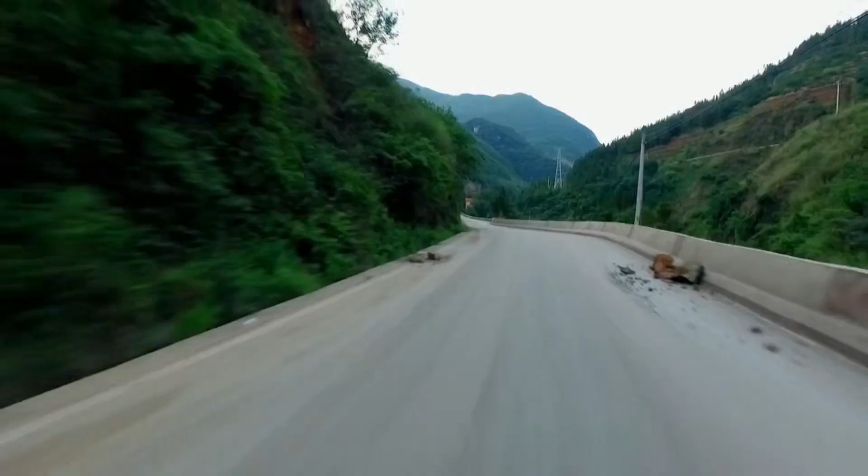The long trip down the steep slope and up the other side is treacherous. It's dangerous, the road, because there's a lot of sharp rocks, lots of steep gorges. You also see a few landslides, so piles of rocks on the side of the road, so drivers have to be very careful. This natural divide has a devastating effect on the community.

There's 35.8 million people in this region of Guizhou. With all these windy roads and steep valleys, it's very difficult for the local farmers to get the goods out of this county to sell them. So as you can imagine, it is one of the poorest regions in China. A solution is desperately needed. But with a nearly half-mile drop to the valley floor, nobody has ever bridged a gorge this deep.

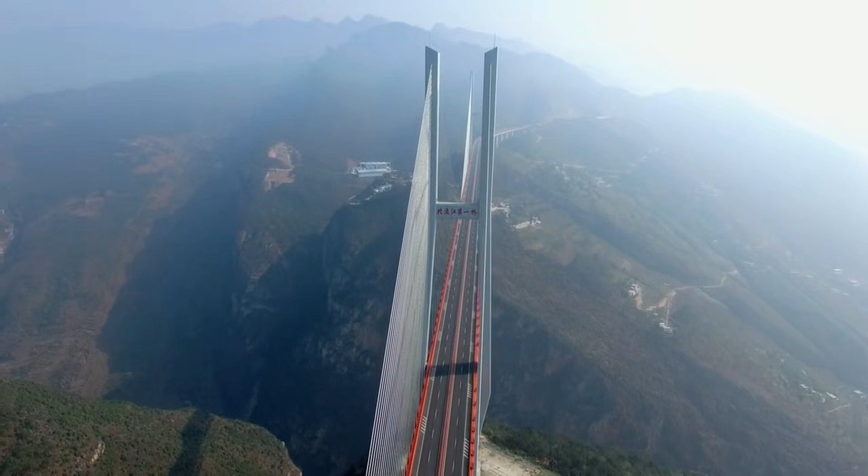The solution engineers in China have come up with is breathtaking. This is the Beipanjiang First Bridge. With a deck nearly 2,000 feet above ground, it's the highest bridge in the world. It is remarkable how high this bridge is and how long it extends. And at almost a mile long, it's one of the longest cable-stayed bridges on the planet.

Liu Ba is deputy chief engineer of the bridge. So this is the Beipanjiang Bridge. Yeah. It's normally off-limits to pedestrians, but he's giving two colleagues a unique tour. It's very high. Very high? Yeah, very high. When we came here, it's very difficult to go to the two sides. Yeah. It's the highest bridge in the world now. Yeah. Such a beautiful bridge.

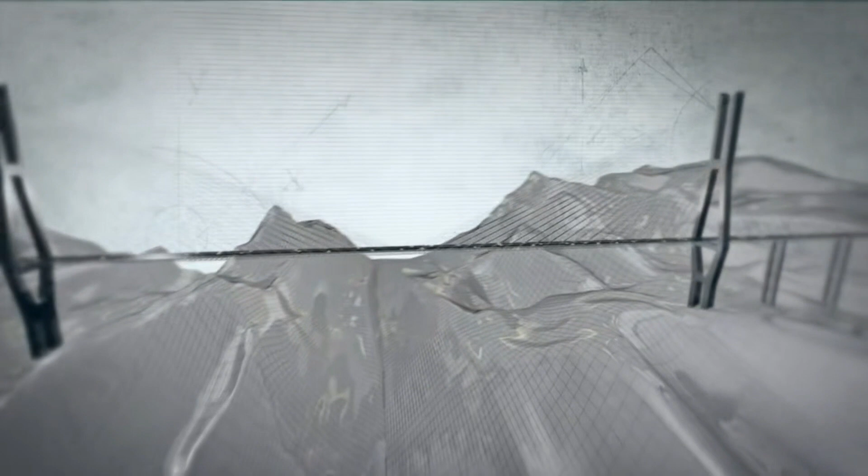The bridge is made up of a pair of massive concrete towers, the tallest reaching 883 feet high. The 22,000-ton steel bridge deck is the length of 5 Titanics. It's so high, One World Trade Center in New York could fit underneath. The deck is attached to the towers with 250 miles of cables, enough to stretch from New York City to Washington, D.C.

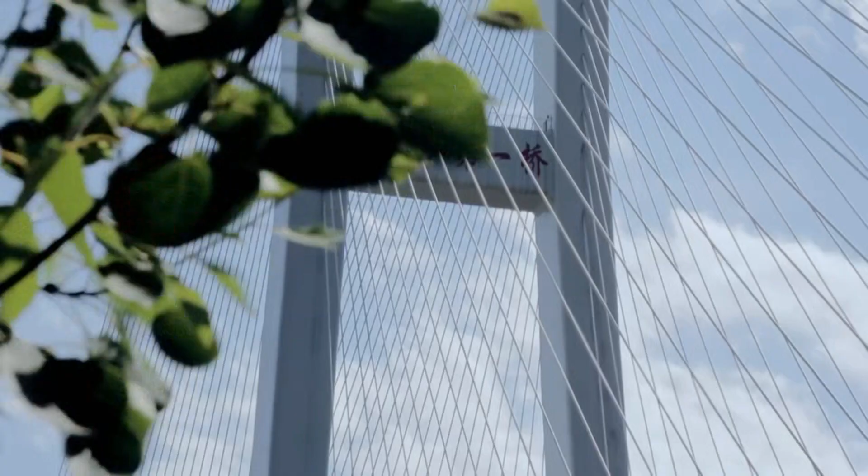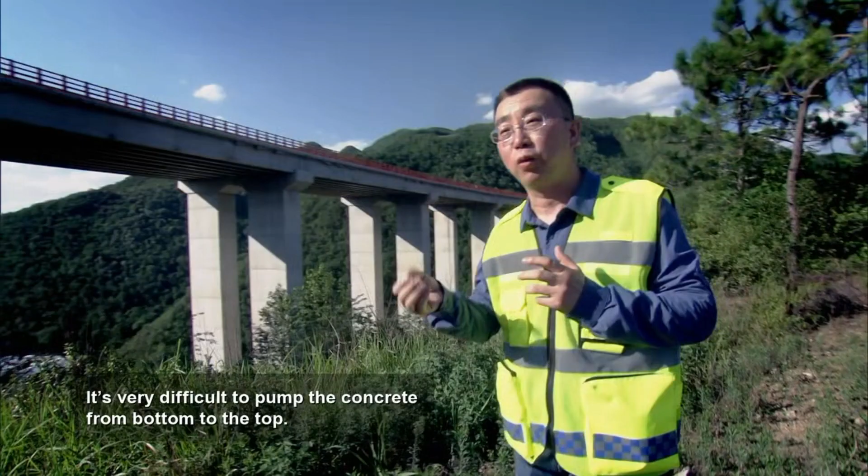But to create this unprecedented structure, the team need to solve many tough engineering challenges. How do you construct terrifyingly high concrete towers? It's very difficult to pump the concrete from the bottom to the top. It's really a critical issue during the construction. How do you assemble a super long bridge deck in such a dangerous environment? The valleys here are so deep you can't even see the bottom. This is too high to build temporary scaffolding for a bridge deck.

And what type of bridge do you build on vertical cliffs full of hidden caves and crumbling rock? To build a bridge here is really a great challenge for me. I'm not sure we can achieve it or not. Before engineers could even get started, they would have to find a way to work with the area's deadly geology.

The rocks around this region are very soft. Also, it's very steep. To make things even more difficult, there are a lot of hidden caves and cracks along the mountain. This poses a huge challenge for the engineers to design the bridge. Most types of long-span bridges need support anchors built into the rocks.

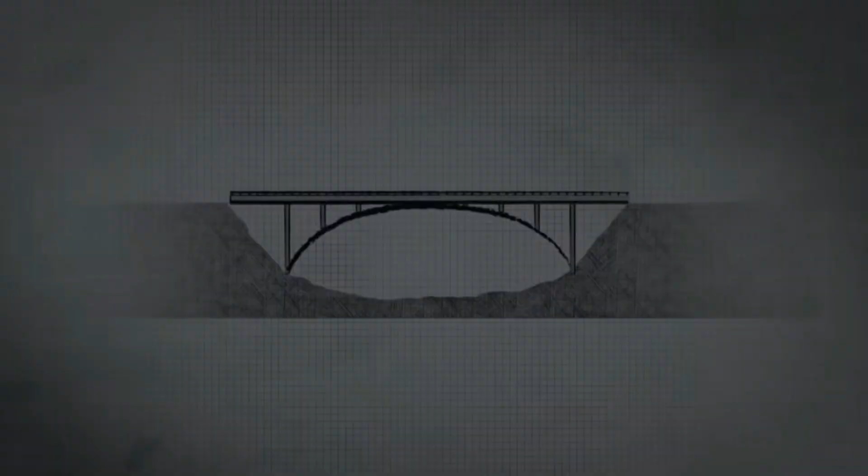For an arch bridge, weight pushes down, and the bridge's curved shape moves the force sideways. So they need gigantic anchors in the banks. On a suspension bridge, the deck hangs from 2 cables, which also need huge anchors to keep the bridge from collapsing. But the soft, crumbly, landslide-prone rock in this region isn't suitable to hold massive bridge anchors.

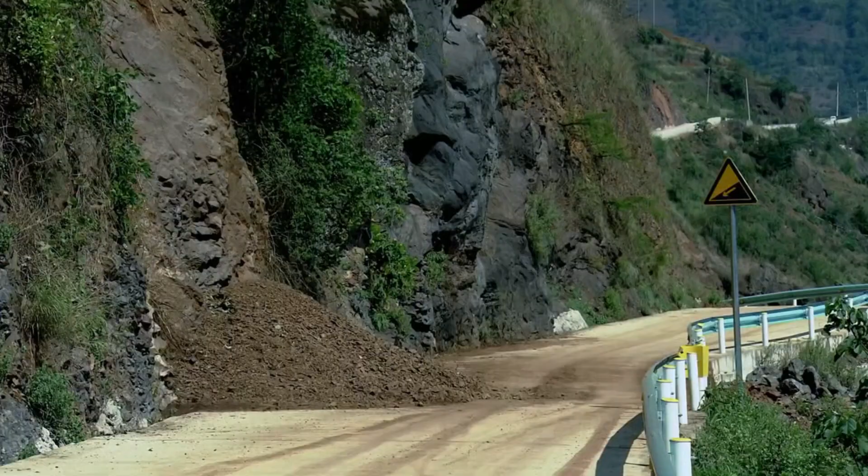Liu Ba is on site surveying the rock. This is an example of the difficult geology, the limestone rock, and you can see so many caves and cracks on the rock. That's quite a big issue for the bridge design and construction. It's really a nightmare for the engineer. The only option is to find a bridge design that doesn't need the support of anchors, which means the team will have to draw inspiration from the pioneers of the past.

This is amazing. A tour of London on a beautiful sunny morning on a boat on the River Thames. Physicist Andrew Steele is exploring London from a unique perspective. Look at this absolutely beautiful structure. It's the iconic Tower Bridge. From down here, this structure just looks absolutely enormous. There's an incredible range of bridges in the British capital, which could help inspire the team in China.

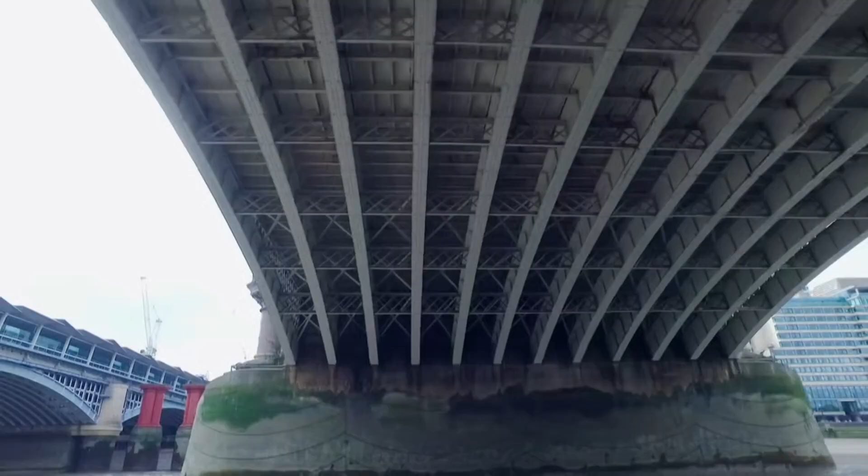This is Blackfriars Bridge. It's an arch bridge. It was constructed in 1869, and from underneath you can see these beautiful wrought iron ribs which are holding the whole structure up. Here we have Chelsea Bridge, a suspension bridge. You can see that big red cable running along the top. That's the main cable. Among these famous giants, there's a lesser-known bridge that's actually one of the most important in the world.

This is a piece of engineering history, an entirely new type of bridge that people didn't think at the time could even be constructed. Built in 1873, this is Albert Bridge. From an engineering point of view, there is an awful lot going on here. You can see we've got these support columns, we've got the curved cables, the straight cables. Pretty daring for the time.

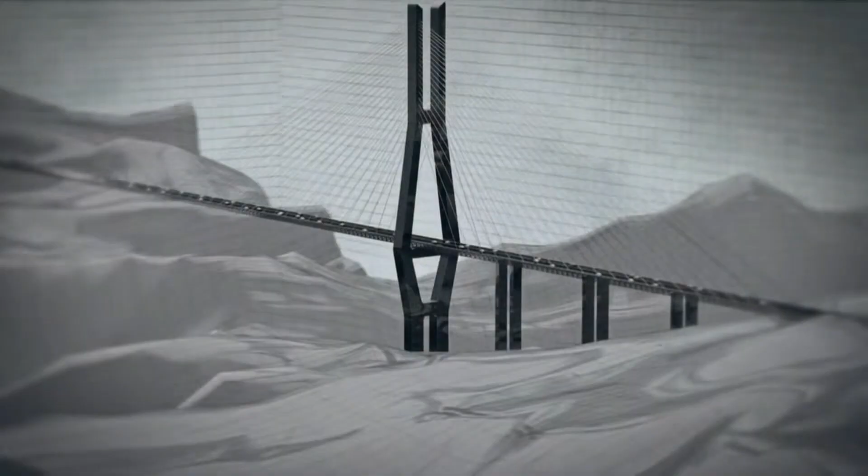Albert Bridge is the brainchild of British engineer Rowland Mason Ordish, who was determined to build the impossible. The Victorians had managed to build loads of different kinds of bridges, but there was one particularly desirable design that remained elusive. It's called the cable-stayed bridge, and the idea actually dates from centuries before. It was in the 1600s that the first cable-stayed designs were proposed, even before the existence of actual cables. The design of a cable-stayed bridge means all the weight is carried up through the cables and down through the towers, so it doesn't need anchors on the banks.

But in the 19th century, building a cable-stayed bridge had never been successful because the forces are so complex. The problem was the maths was just too hard. Imagine trying to calculate all the forces on one of these cable-stayed bridges. You've got loads of different cables, all at different angles, pulling on the bridge, pulling on each other. It's a trigonometry nightmare. Over-tensioning even a single cable could lead to a catastrophic failure. For 200 years, people thought the cable-stayed bridge was never going to be built.

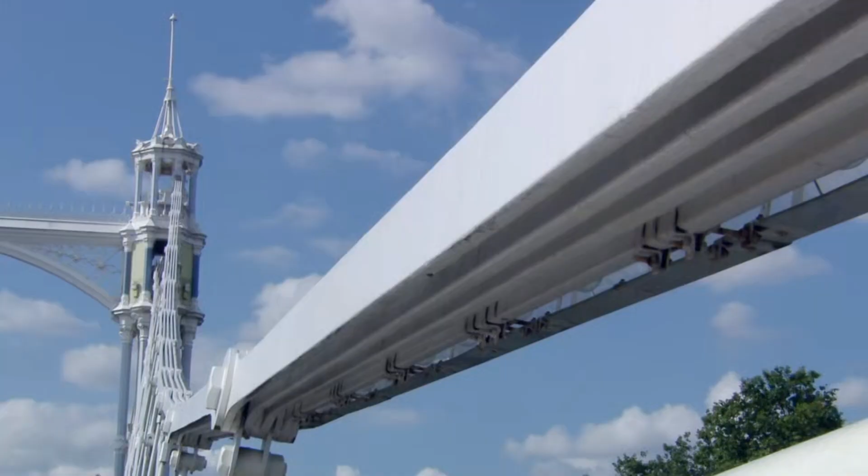Ordish knew the risks of building a cable-stayed bridge. So to ensure Albert Bridge didn't fail, he ingeniously combined it with a suspension bridge. From up here, you can really see what's going on with this bridge. Since we're in the middle, this is the main cable, the suspension bridge aspect of this structure. And we've then got these smaller suspenders. What these do is connect the main cable to the span of the bridge, allowing it to support the bridge at multiple points along its length.

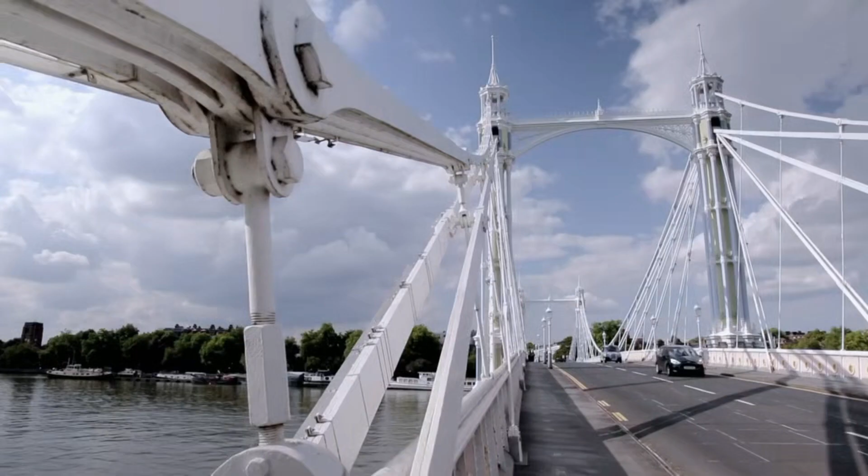And then finally, this is what makes this bridge so special. Here we find the cable stays, and it's really clear from this angle what they do. They're taking some of the load from this span and then transferring the force up into those towers there. This is two bridges in one, and that is the genius of Ordish's revolutionary design. Albert Bridge was a major step towards building a pure cable-stayed bridge that didn't need anchors. Exactly what the engineers in China are looking for.

And today, cable-stayed bridges are commonplace. So when you see a modern cable-stayed bridge, it's all thanks to pioneers like Ordish, who, over 150 years ago, showed that this elegant and deceptively complex design could be done. In China, engineers are building on Ordish's groundbreaking work and supersizing it for the 21st century.

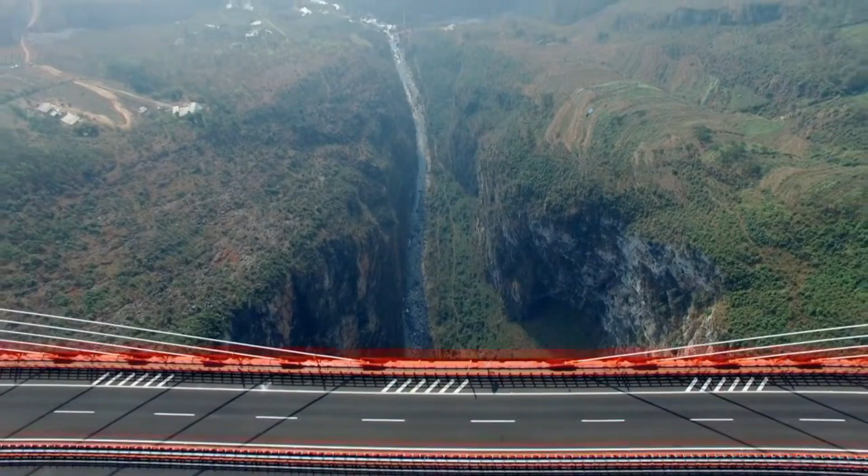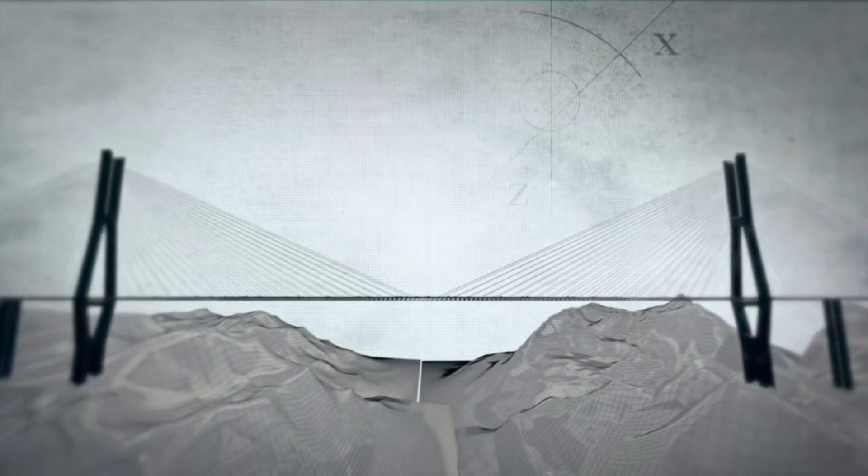The Guizhou and Yunnan regions of China, separated for centuries by this cavernous abyss, until now. This is the Beipanjiang First Bridge. The bridge stretches almost a mile across the ravine. The tips of the towers reach 2,461 feet above the valley floor, higher than 2 Eiffel Towers and the Statue of Liberty combined. And it's the first ever cable-stayed crossing to hold the title of world's highest bridge.

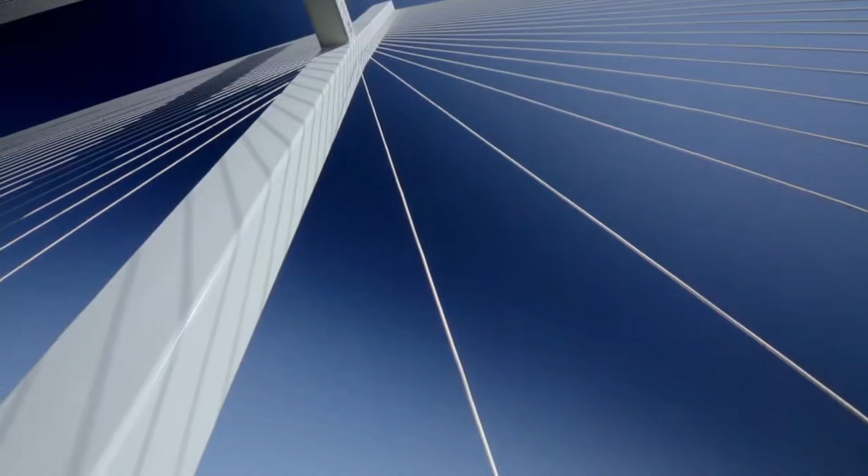Architect Wendy Falk has special access to this engineering marvel. This bridge is amazing. This is so exciting. I'm gonna actually go and climb over this and take a closer look at the cable stay myself.

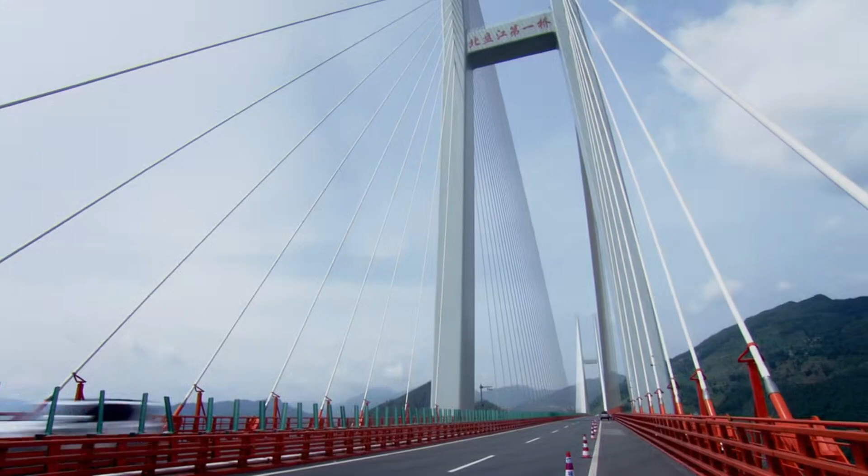The view up here is absolutely insane. It's actually quite amazing that this bridge is held up by the cables and by these amazing towers that are on the left and right of us. So there are no anchors on this bridge. The only way to build this bridge in this region is to have a cable stay design. The load from the 22,000-ton deck and everything on it is carried through 224 cables into the towers and down into the foundations, removing the need for anchors.

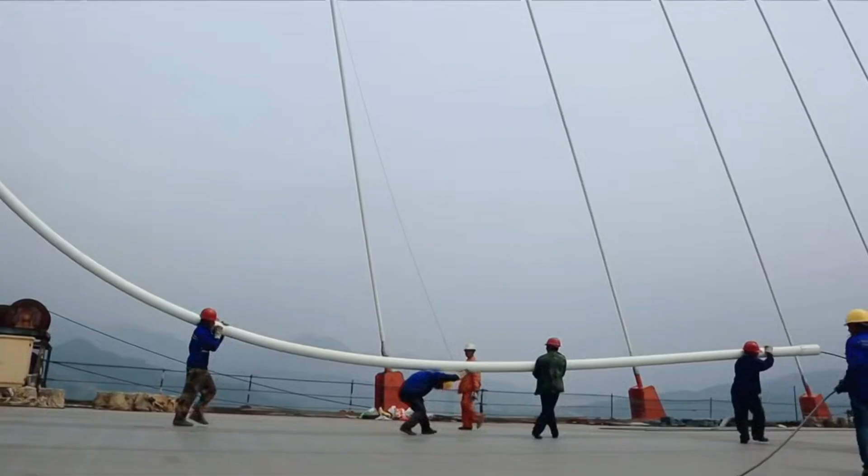But attaching each cable was an extensive job for engineers. There's actually a lot of smaller cables on the inside that's bundled up that is then connected onto the anchor point on the bottom. First, one of the cable strands is pushed through a waterproof casing. It's then attached to one of the towers and joined to the bridge deck. More strands are then threaded through the casing. Up to 43 make up one cable bundle, the longest of which is 1,253 feet. Each bundle is tightened into a carefully calculated strain.

Getting the cables and the tension right in this bridge is crucial. So inside of each of these cables is a gauge that measures the constant tension on this bridge. If any of the strand cables fail, engineers in a control center can immediately spot and replace them. The marvelous aspect about this bridge is that even if you were to remove one cable, the bridge is still stable. And that's pretty incredible.

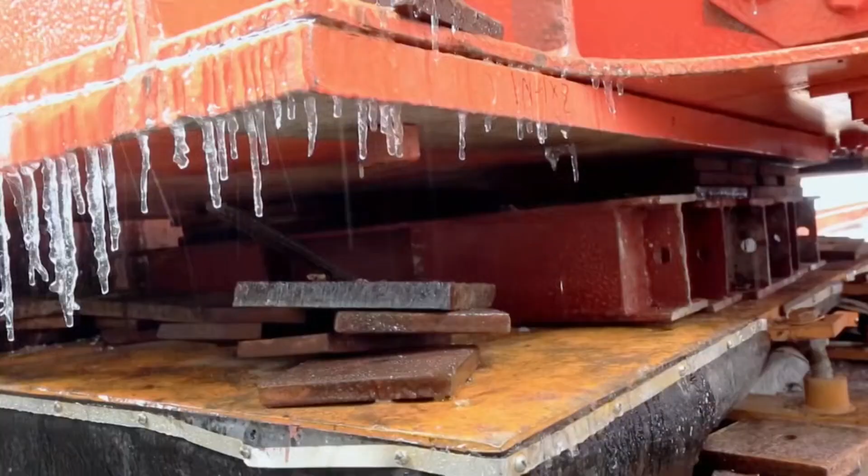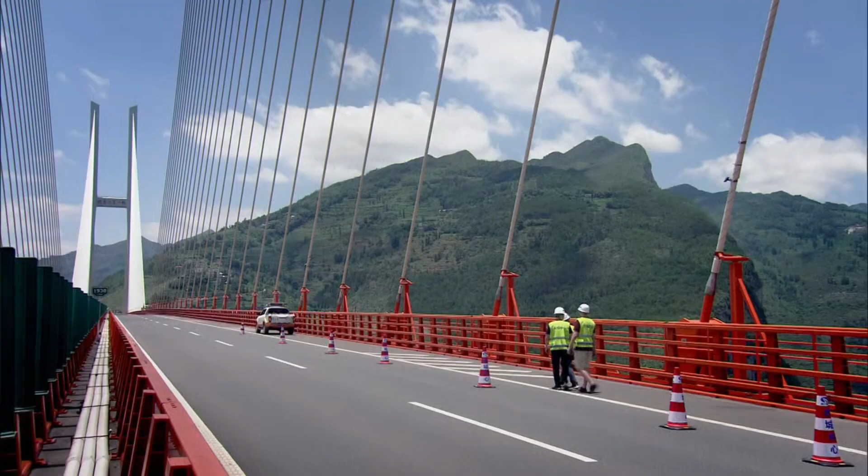But winter in Guizhou brings a new onset of problems. It is one of the most severely frozen areas in western China. And because of the bridge's altitude, ice could form on the cables. It's a potentially deadly problem that Liu Ba and his team have to solve. If the ice spreading comes, there will be some problems related to the safety of the traffic. So the ice will cover the cable in the winter. Yeah, the ice will accumulate.

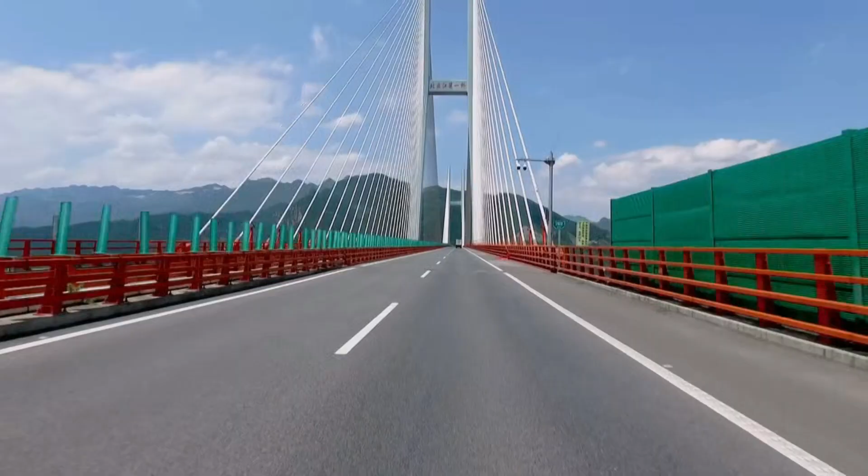Most bridges propose the cables in the middle, just above the carriageway. Yes. When the ice accumulates on the cables, there will be ice fragments falling down onto the deck. With the risk of falling ice causing a potentially fatal traffic accident, engineers came up with a brilliantly simple solution. For this bridge, we propose the cables out of the carriageway on the edge of the deck. Then ice drops out of the carriageway. That's very clever. Yeah. Moving the cables to the edges of the bridge will force ice to fall safely into the valley and keep this lifeline flowing all winter long.

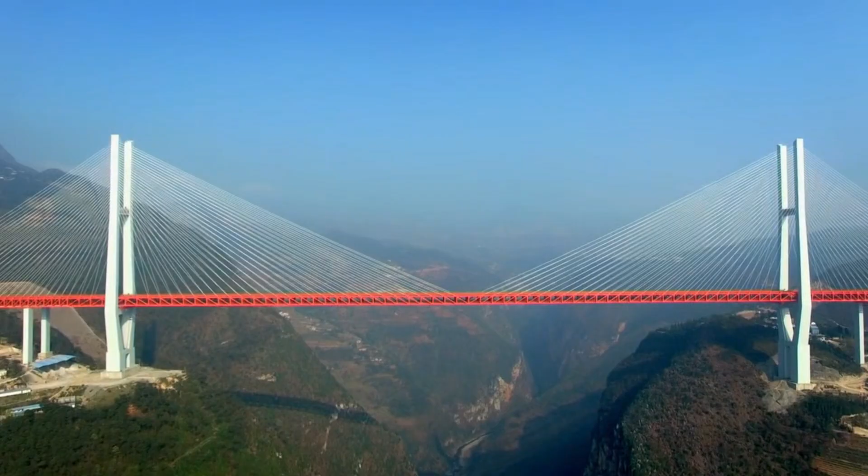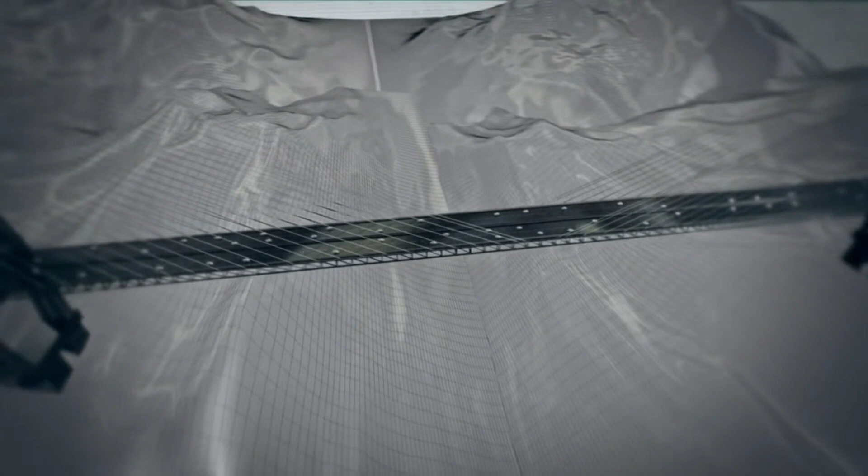But engineers have even greater challenges ahead. In order to build the tower, the engineers have to think about getting concrete all the way up to the top. It's just mind-boggling. Guizhou, China. Known as the crack in the earth. To cross it, engineers are taking on the impossible. With the world's highest bridge. The Beipanjiang First Bridge is a crucial crossing for millions. At almost a mile long, and with a staggering 2,362-foot main span, this is a cable-stayed bridge on an epic scale. But designing a structure of this magnitude presents a terrifying set of challenges.

Architect Wendy Falk has traveled from New York to check out this engineering marvel. This bridge is incredibly long, and it's really rare for a cable-stay bridge to be this long. Devising a super-long cable-stayed bridge is extremely complex. Everything is connected. If one thing changes, everything else is affected too. Imagine my hands are the cables, and as the span of the bridge gets longer, the angle of the cables gets flatter, and that's bad because it puts the deck under compression. There's an optimal angle for these cables, which is 30 to 40 degrees. And in order to build a bridge this long, you need a very tall tower. Basically, the longer the bridge, the taller the tower.

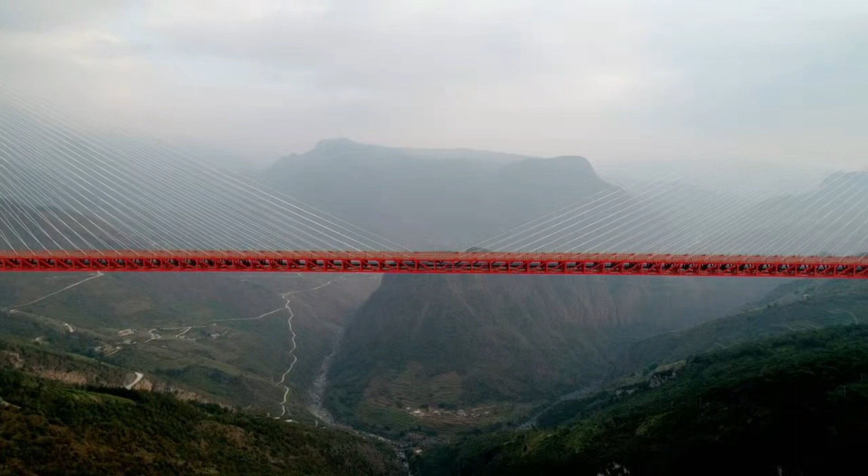This exceptionally long bridge needs exceptionally high towers. In order to build the tower, the engineers have to think about getting concrete all the way up to the top. It's just mind-boggling. So how do you build soaring concrete towers? The answer lies with a pioneering innovation from the past.

I'm pretty excited to be here. This is a really special piece of engineering history, and not many people get a chance to come here. Physicist Susie Sheehy is in Hampshire in the south of England. 330 steps. I don't even think I'm halfway. She's getting an exclusive look at a little-known but vital piece of engineering history.

In the 1860s and 70s, there was a huge fascination with building stuff with concrete. People would build sculptures and other objects, but no one had yet dared to build something as audacious as a tower out of concrete. They all thought it would collapse under its own weight. But one man was determined to prove everyone wrong. Aha! Finally made it to the top.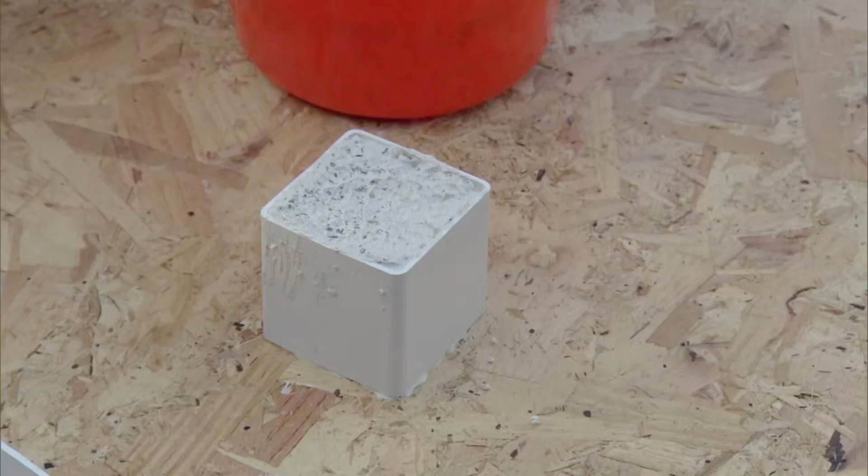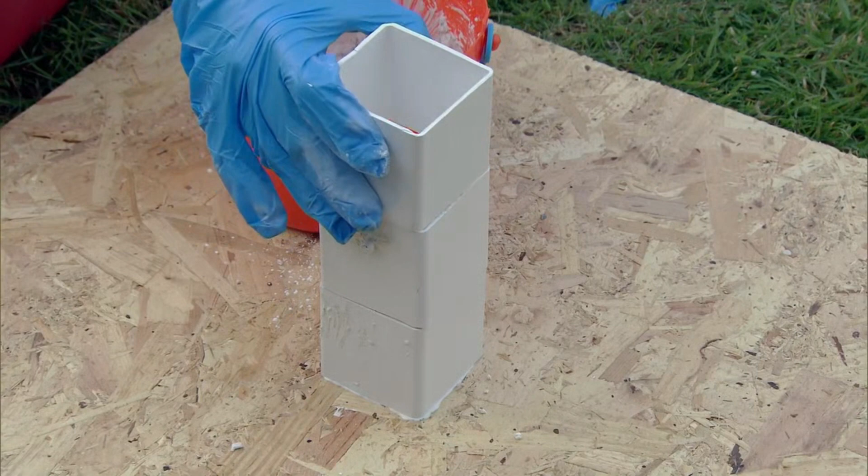So how do you make a concrete tower? Well, obviously concrete, and a mould to form it in, and the concrete then gets pressed into the mould. The next step to build my tower up is to get another mould and keep going. That's looking pretty good, so I'm going to add a third one. But in the 1800s, the moulds were the most expensive part of building with concrete. Peterson came up with a brilliantly simple solution to use fewer moulds, but still build high.

By the time I've poured in the top two moulds, the bottom one has set. So then I can remove the bottom mould and place it back on the top and keep going. And then you could just keep doing this, moving the different moulds up, and the tower would grow floor by floor. And the only limit was how tall you dared to go. It's called climbing formwork. Yes, there we go. And it's still the go-to method for building tall concrete towers.

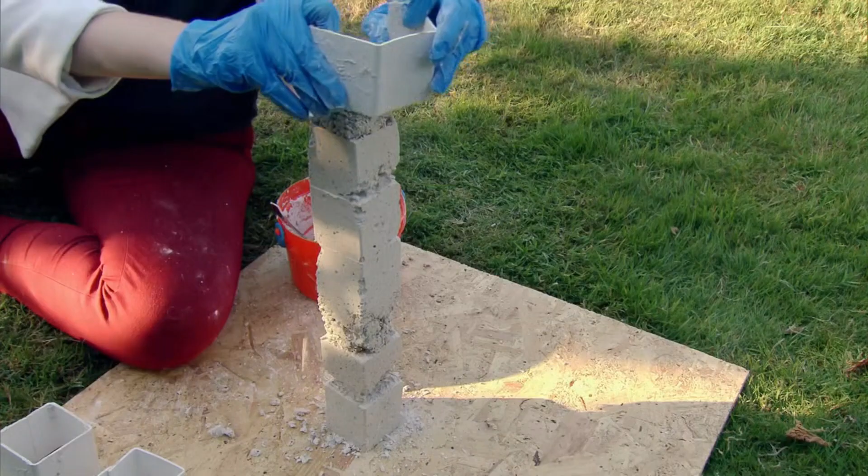Oh goodness. There we go. I think if Peterson saw this, he'd think I need a little more practice before I build a real one.

Incredibly, Peterson used just 3 moulds to build this entire concrete tower. It's still the tallest non-reinforced concrete structure in the world. What's incredible is you can still see the lifts where each of the layers of concrete was poured, and it would have taken 2 days to fill each one and then 2 days to move the bottom one up to the next layer, and it took 6 years to build.

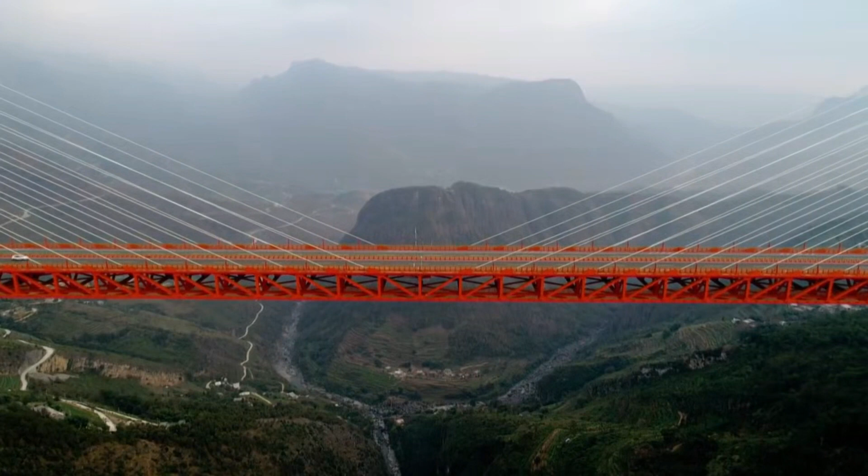Peterson proved the world wrong. He showed us 130 years ago that we could build a tall tower out of concrete, and that paved the way for us using concrete in structures today. Now, engineers in China are using Peterson's revolutionary construction method and taking it to the next level.

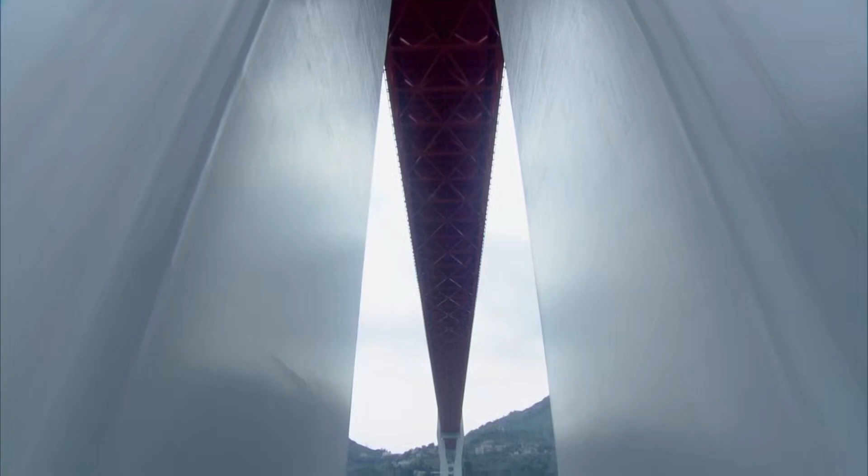The Beipanjiang First Bridge in China boasts 2 massive towers, the tallest reaching 883 feet. Engineering megastructures in their own right. This thing is colossal. You can see from top to bottom, it's just so big. But before these towers could be built, engineers first had to make more than 130,000 tons of concrete. Zhou Ping, director of the Beipanjiang Bridge, is tackling this issue.

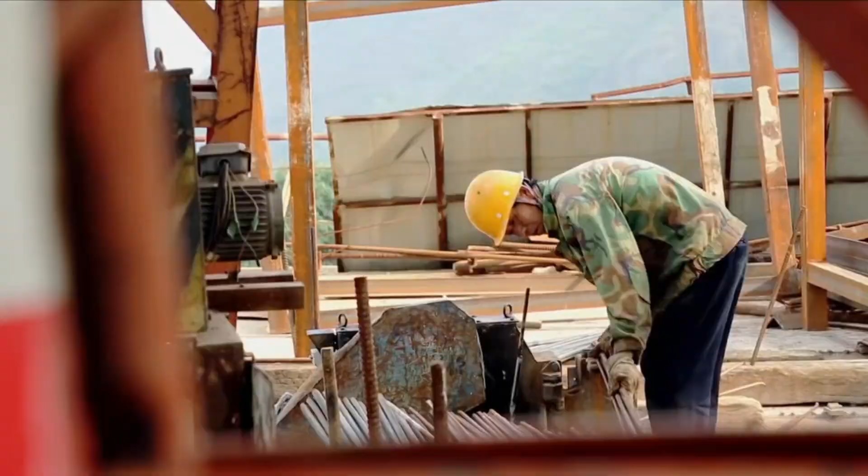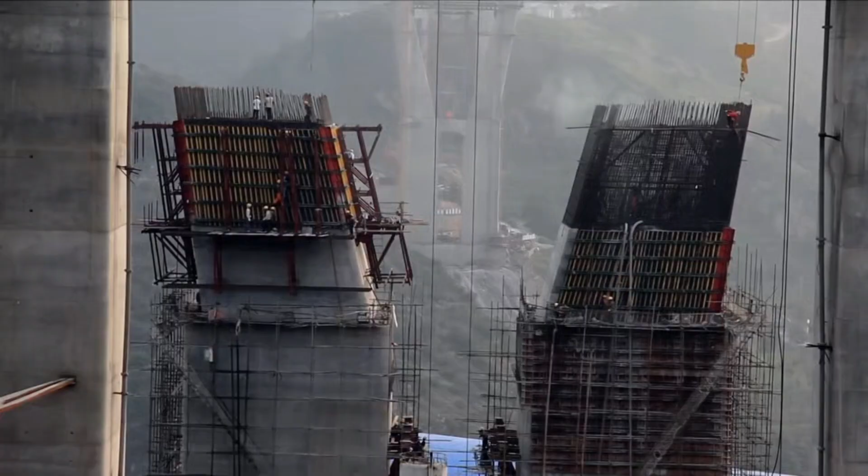Finally, construction of the towers can start. Thousands of steel bars are formed into a grid to reinforce the concrete once it's poured. Just like at England's Sway Tower, climbing formwork is the key to raising these super towers. In order to build the tower, the engineers had to design a mould. And then they added concrete into the mould and then lifted it up manually so that they went up section by section. Assembling the moulds manually enables precise control, so engineers can form the demanding H-shaped design.

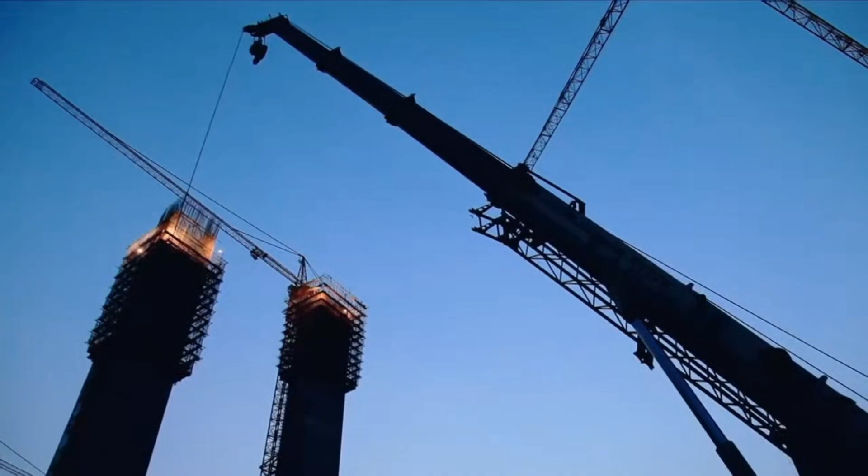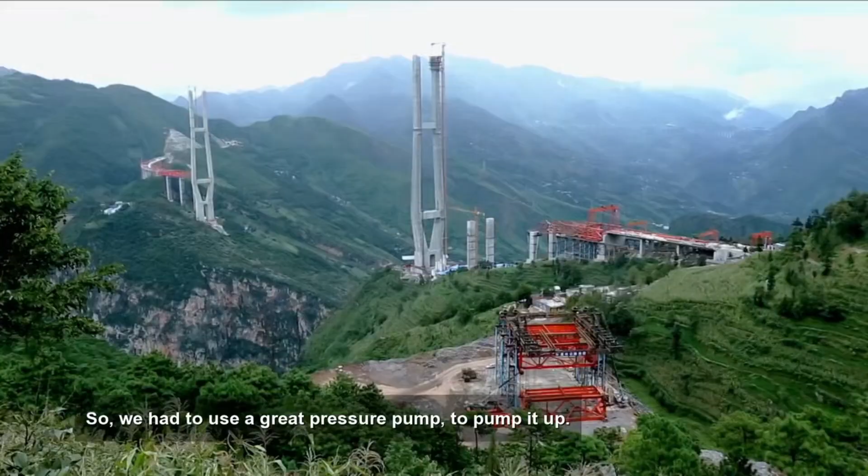But as the towers grow, so do the challenges. Initially, concrete is lifted in enormous vats by huge tower cranes. But at greater heights, a pump is needed. Man-made sand is a little bit rougher than natural sand, so it is difficult to pump up to the top of the tower. So we have to use a great pressure pump to pump it up. A high-powered, gravity-defying pump is used to propel the thick concrete to a height of almost 900 feet.

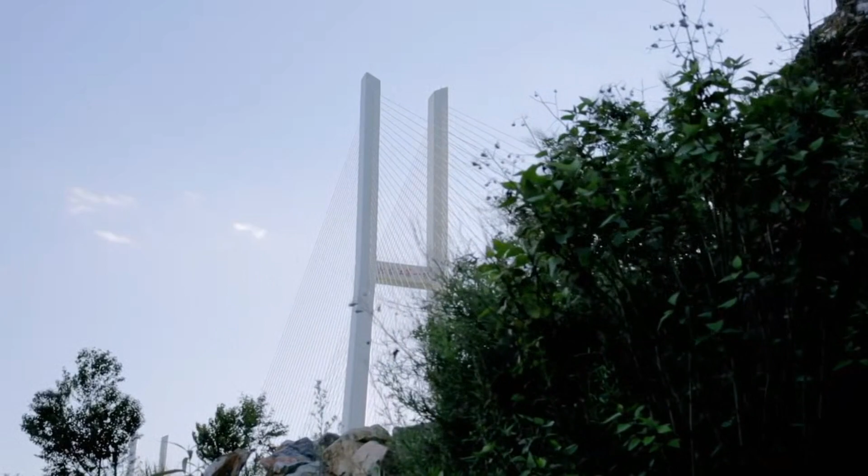These towers seem to be going on forever. You can't even see the top of it. It is quite amazing here. More than 12 million gallons of concrete were used to make this pair of colossal towers.

And you can still see the lines that are left behind from the mold all the way to the top, and that's pretty cool. These exceptionally tall towers ensure the cables are at the optimum angle to take the weight of the massive bridge deck. Because the bridge needs to be so long, these towers need to be so high, and the engineers definitely did that.

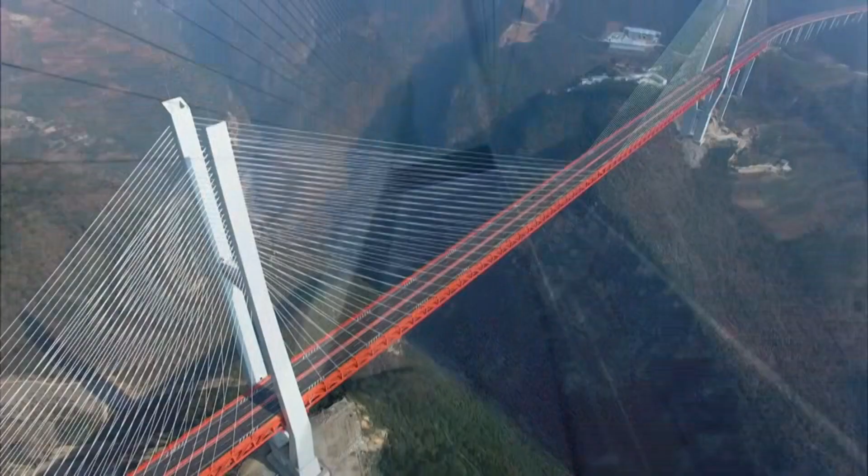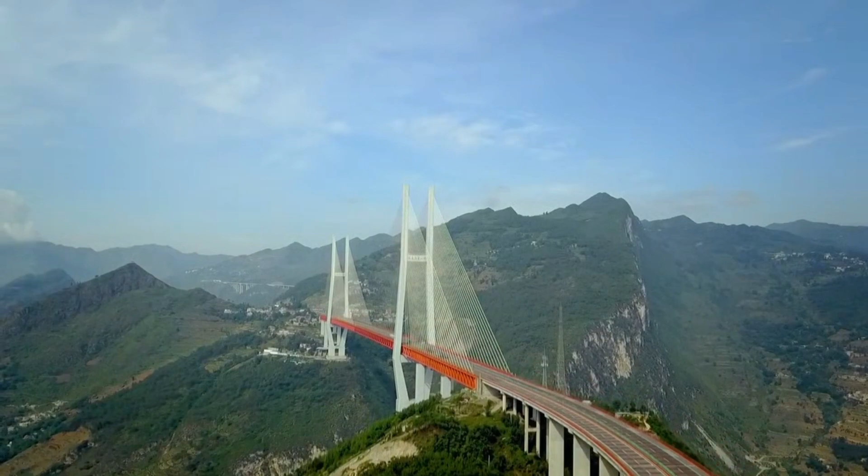But to bridge this mighty chasm, engineers will face their greatest obstacle yet. It's impossible to build a scaffolding to reach up here. Guizhou, the most poverty-stricken region in China. This impassable valley restricts development. The solution? The Beipanjiang First Bridge, the highest on the planet.

At 883 feet, the largest tower is taller than Rockefeller Center in New York. The two towers hold 224 cables with a combined length of 250 miles, 5 times longer than the Panama Canal. Engineers are now facing the most dangerous phase of the project, constructing the bridge deck.

It's a gorgeous view. Super deep. New York-based architect Wendy Falk is at one of the project's highest points. It's so difficult to even see to the bottom of this valley. It's impossible to build a scaffolding to reach up here, to build a bridge deck. So the engineers had to find another way. Now, engineers need to support the nearly mile-long bridge deck while it's being built without scaffolding. A feat that might not be possible if it weren't for the innovators of the past.

Engineer Luke Bisby is at the Firth of Forth River, near Edinburgh in Scotland, to see a piece of engineering that could help out the team in China. In the late 1800s, engineers were in a desperate race to build a rail line between London and Aberdeen along the shortest route. And this meant building a track along the east coast of Scotland. But this huge estuary, the Firth of Forth, was standing in the way and presented a major obstacle.

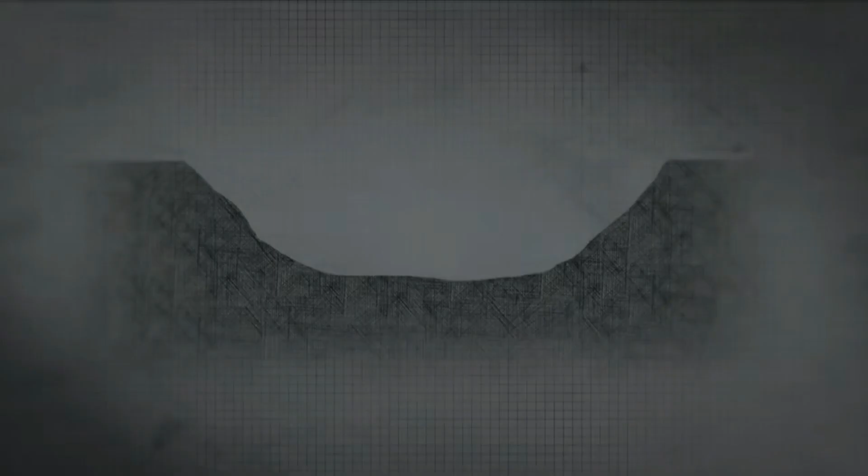The typical method of building bridges at the time was to use temporary scaffolding to hold up the span while it was constructed. Once complete, the scaffolding was removed, leaving the finished bridge. Here, it's completely impractical to build a bridge with a scaffold. Not only is the estuary very wide, but it's also very deep. And even if you could get your scaffolding poles down that far, the bottom is completely full of mud and silt, and so they wouldn't hold.

Here, it would take an incredibly bold engineer to build the bridge without a scaffold and of the enormous span lengths required, which had never been attempted before. British engineer Benjamin Baker risked his reputation when he took on this impossible challenge.

I really can't believe I get to do this. Normally, only engineers who work here get to be here. Morning. Morning.

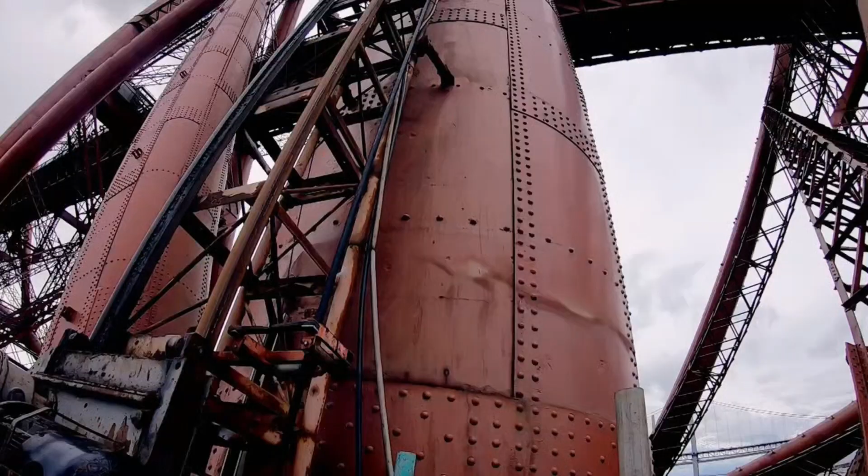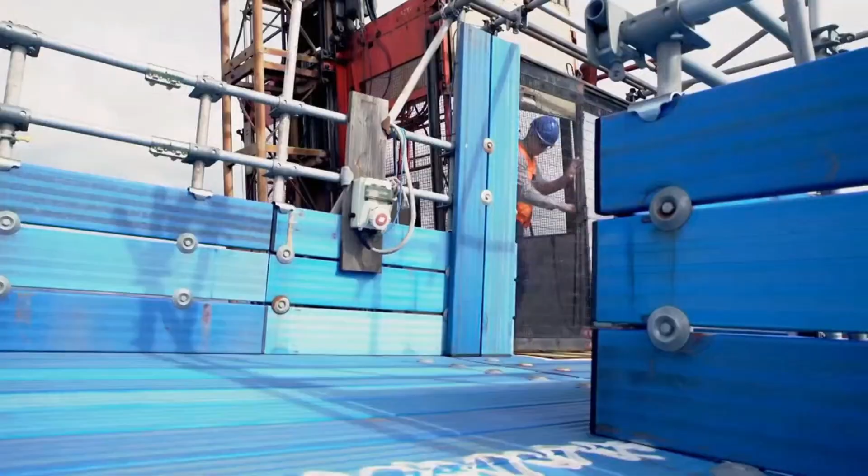Baker's solution is one of the most astonishing pieces of Victorian engineering anywhere in the world. Now, this is just incredible. This is the Forth Bridge. Now that is a view. A 1.5-mile-long cantilever design. The longest bridge in the world when it was built. That is amazing. Engineer's bucket list, this one. Constructing such a long bridge here was not going to be easy.

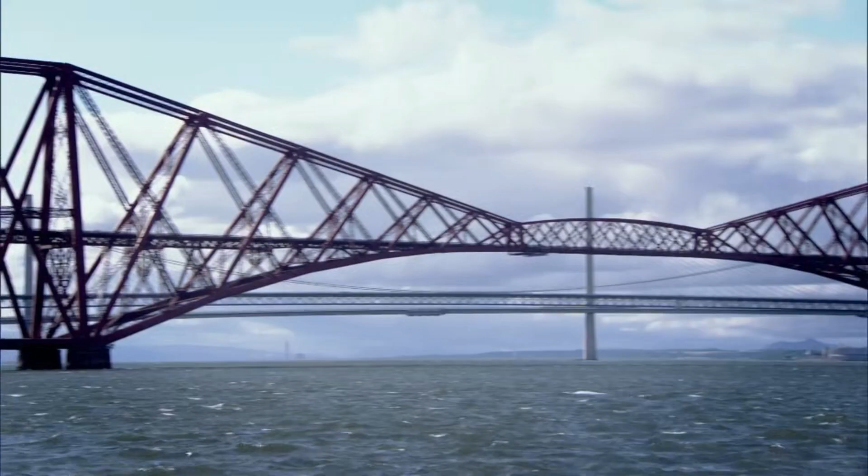However, Baker had an idea that might help the engineers at the Beipanjiang First Bridge. Cantilever bridges are all about balance, with the weight of the steelwork on one side of the tower balanced out by the steelwork on the other. Baker also used that counterbalancing act to construct the bridge. The towers were constructed first, and then the bridge was built out symmetrically on either side.

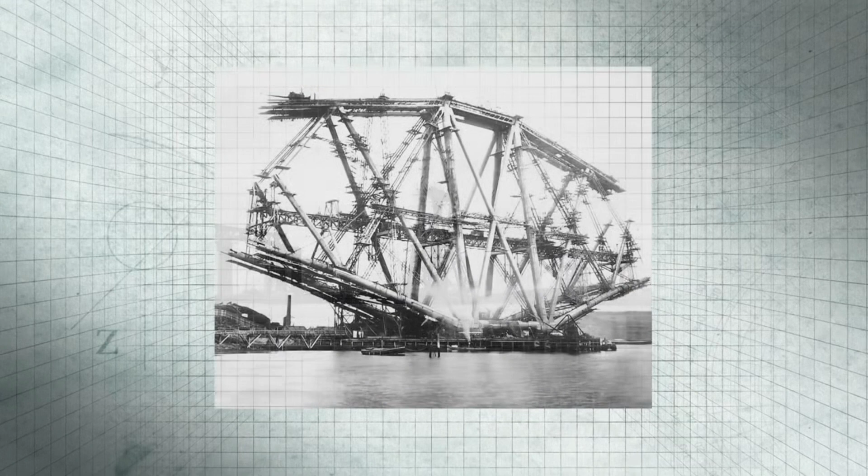Every time a beam was added to one side of the bridge, an identical beam was added to the other side of the bridge. And in this way, the bridge became the scaffolding for its own construction, and it seemed to defy gravity. It was an incredible solution, and Baker's risk paid off. The Forth Bridge opened in 1890. It now carries 200 trains a day and 3 million passengers a year. 130 years ago, Baker's ingenious balancing act changed the way that bridges are constructed. Engineers were no longer reliant on scaffolding beneath bridges during their construction.

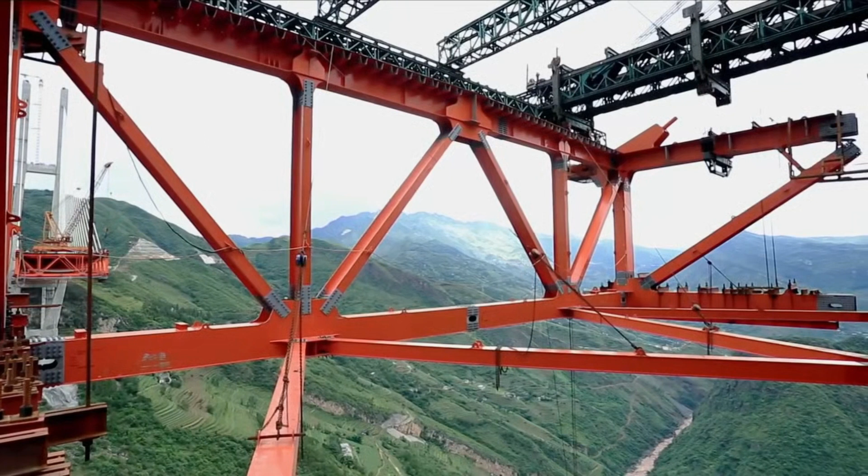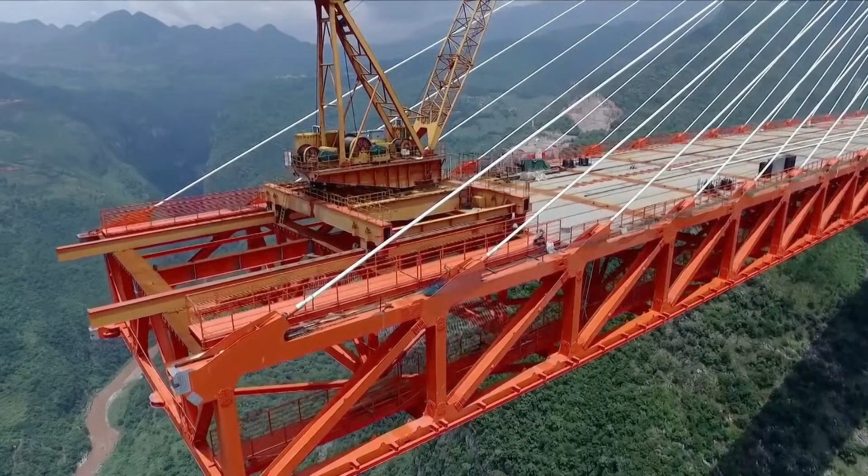At the Beipanjiang First Bridge in China, engineers have taken Baker's simple yet brilliant idea to jaw-dropping new heights. Like the Forth Bridge, they've constructed the deck without scaffolding by balancing it around the towers using cables. In order to build a bridge without temporary scaffolding, let me show you what they did here.

The approach span was already here, so in order to add a new section over the gap, I'm adding a cable to hold it up. To keep the forces balanced, I now need to add a cable on the other side of the tower. Adding the cables symmetrically keeps the forces around the towers balanced and supports the deck.

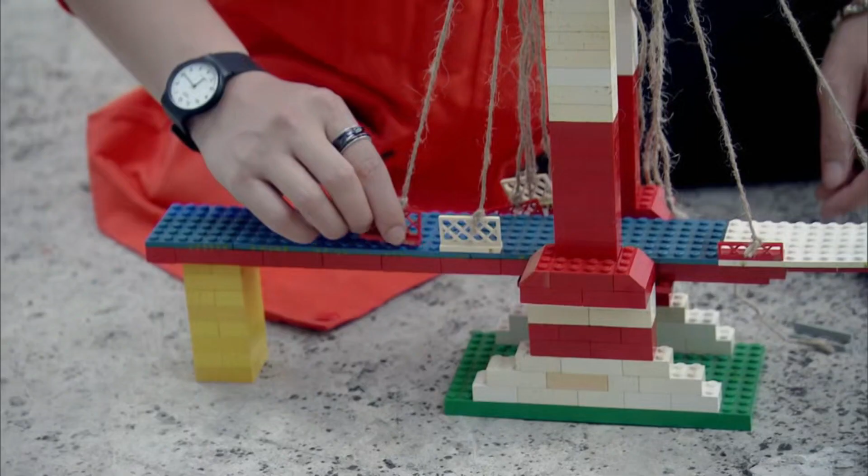And now I'm adding another section over the gap. And every time I do so, I have to add a cable to hold it up. And another one on the other side of the tower to keep it balanced. I add another section, I add another cable on the front, and I add another one in the back. And there you go, a perfectly built cable-stay bridge.

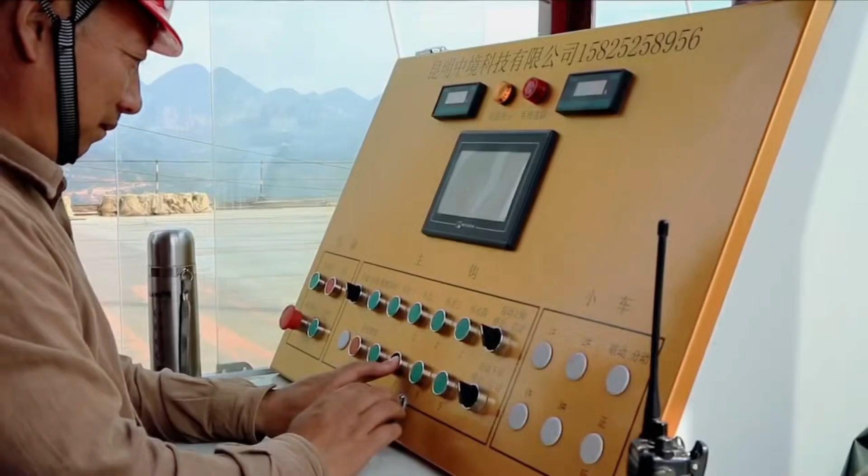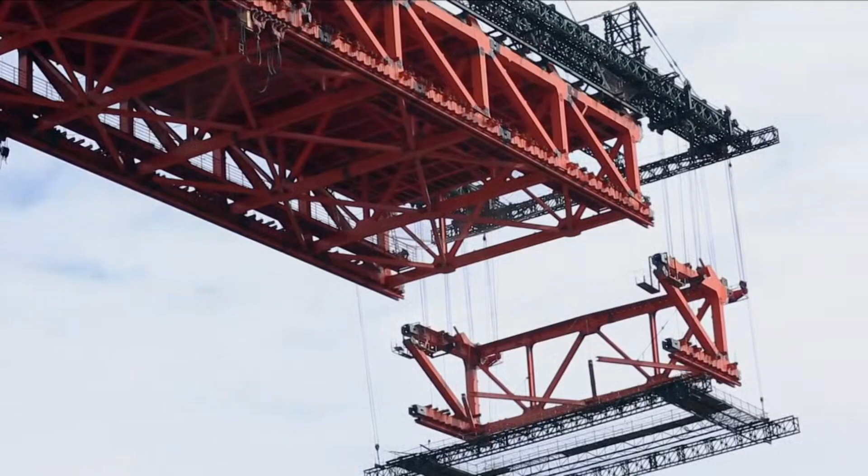During construction, instead of building beam by beam over the deadly drop, the main span is built in sections. Then, for the first time ever, the deck sections are slid underneath the growing span. They're lifted into place, then fixed to the end of the deck. Construction was twice as fast as traditional beam-by-beam building. After only 42 months, the two sides of this vast valley were finally connected.

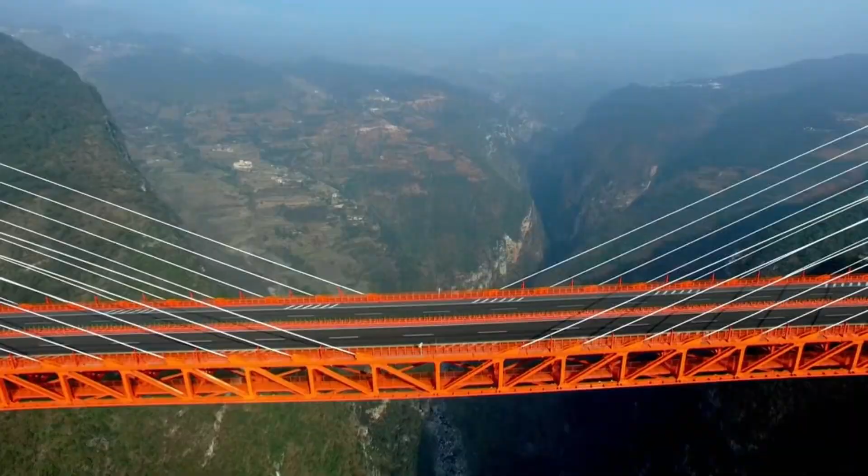Seems like I'm walking forever on this bridge. Can't believe how long this bridge is. What an amazing piece of engineering. But before traffic could cross the massive main span, the team of engineers had one last problem to solve.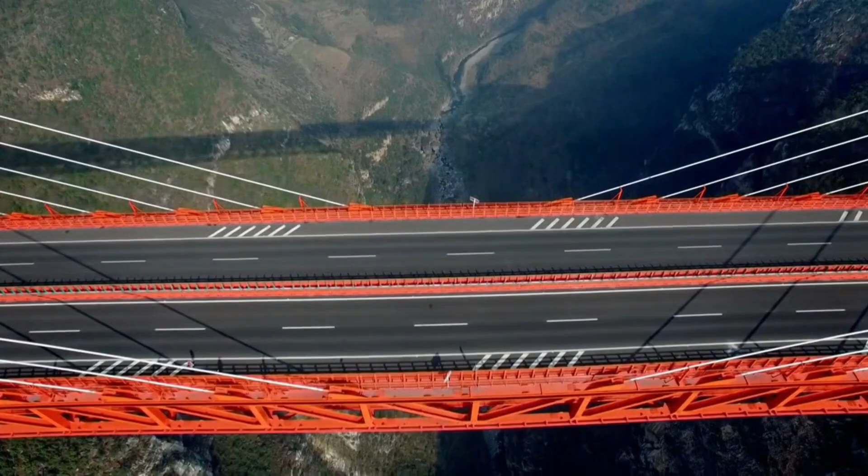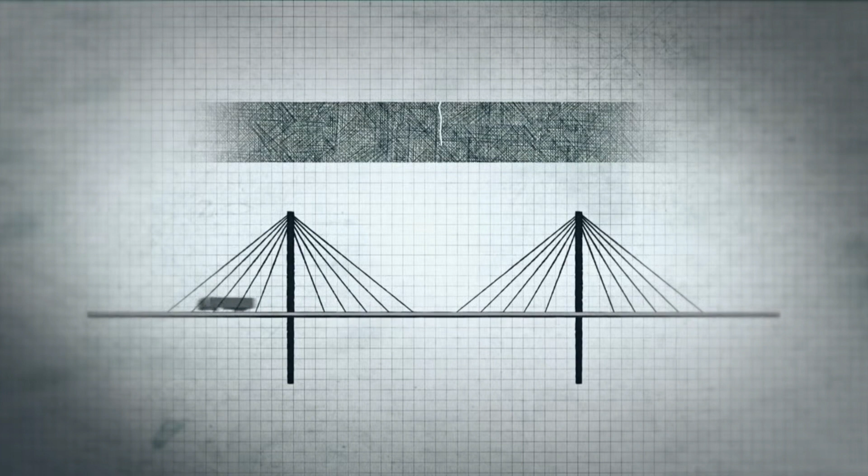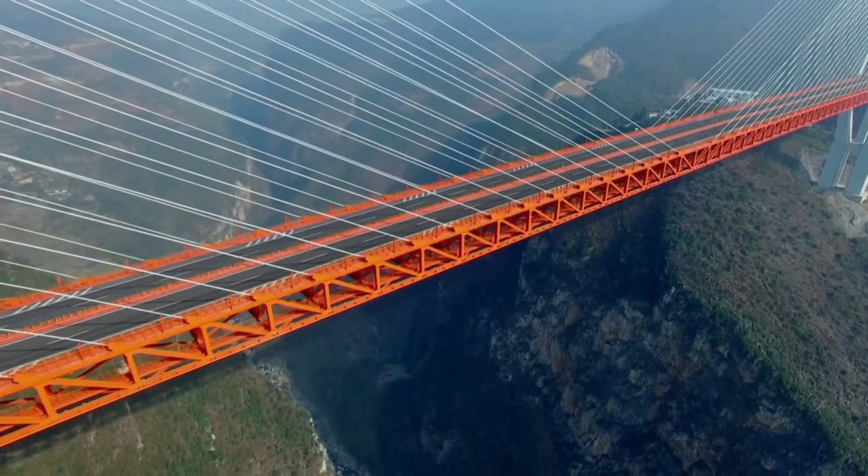When heavy vehicles cross the bridge, if it's not stiff enough, the deck could sag. If this happens repeatedly, it will cause fatigue, which makes the metal very brittle, risking a sudden collapse. Stopping this huge deck from flexing is a serious challenge. The solution? An orthotropic deck. Let me show you how the orthotropic deck works.

We select two pieces of flat card, and we make a bridge here, and then we put some weight on it. Wow, straight away, collapse. The card isn't stiff enough. So next, I will make an orthotropic deck. The two pieces of card are still used, but this time the bottom one will be shaped differently.

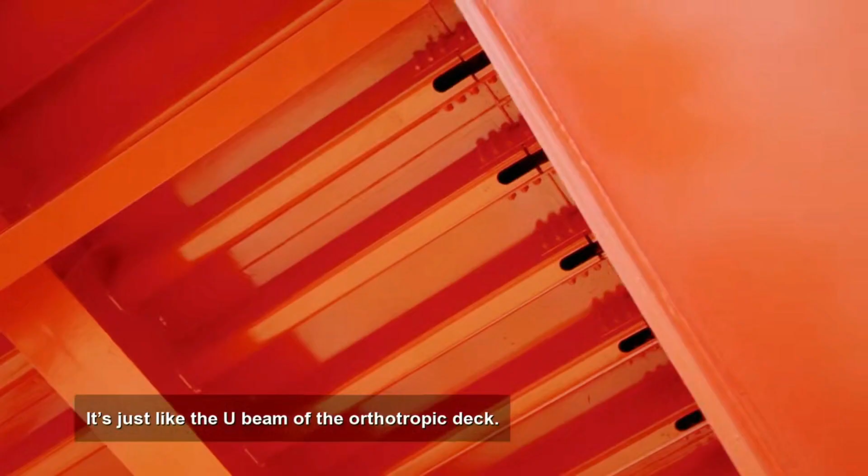I'm folding the card into a box shape. It's just like the U-beam of the orthotropic deck. We can see what happens to the stiffness. A new bridge here, and we put the same weight on it. Oh, still working. Excellent. Just by changing the shape of one of these cards, we can make it much stiffer.

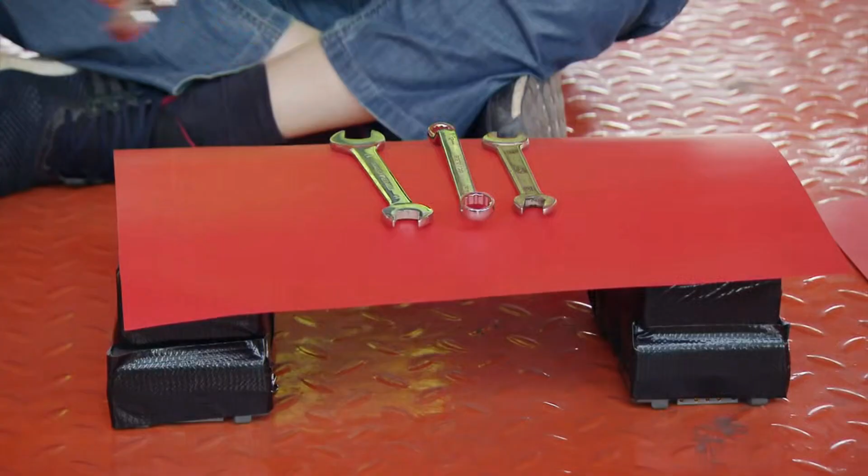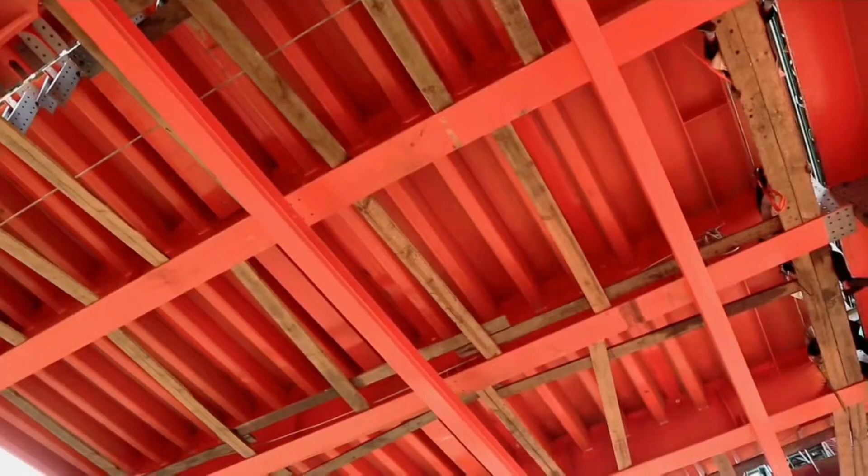Now that the bridge is stiffer, it doesn't flex when it takes heavy loads, solving the problem of fatigue. The orthotropic deck was installed in 34-ton sections. The finished span is so stiff it hardly flexes, even in the middle. To see it, Liu Ba is taking his colleagues to an area off-limits to the public, inside the bridge deck itself.

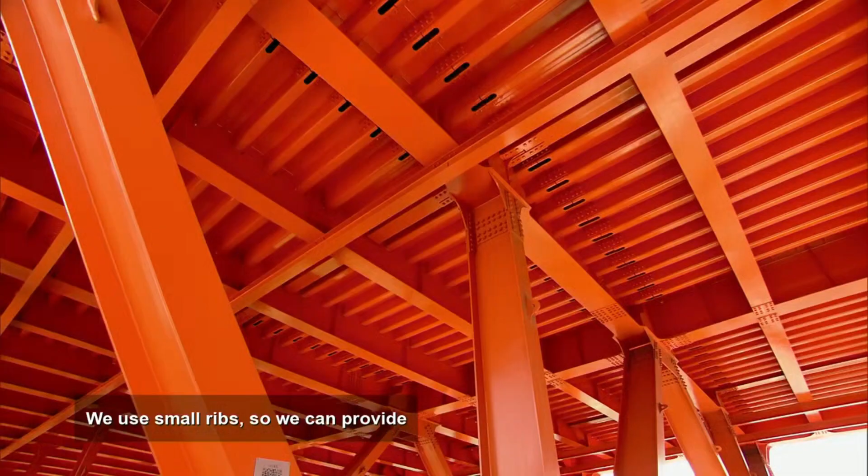Wow, look at this. Yeah, very amazing. We can see the orthotropic deck above, including the top plate and the U-ribs. We use small ribs so we can provide enough stiffness for the heavy trucks. The orthotropic deck is the final piece of the puzzle for this world record-breaking bridge.

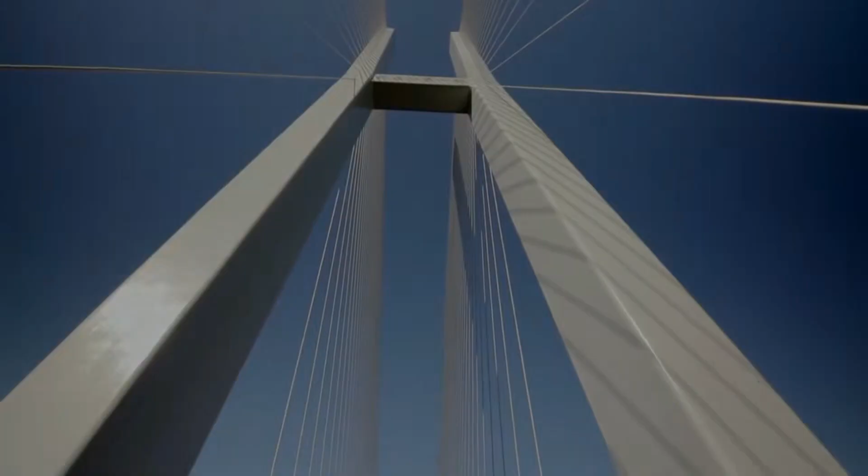It's hard for me to imagine how they actually built this thing at this height. I think it's very incredible. It's very beautiful. Just beautiful. The Beipanjiang First Bridge is taking engineering to breathtaking new heights. I can't imagine how this bridge could be built if it weren't for modern-day technology. You know, we really conquered so many challenges from the very beginning stage. It's really impressive.

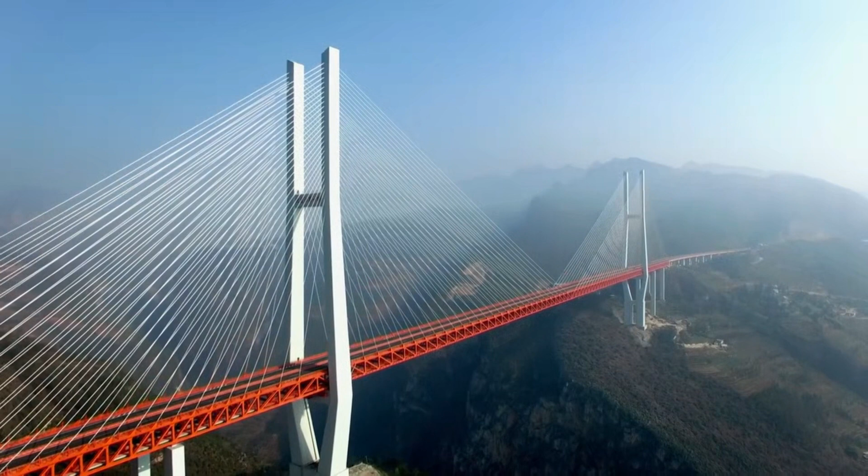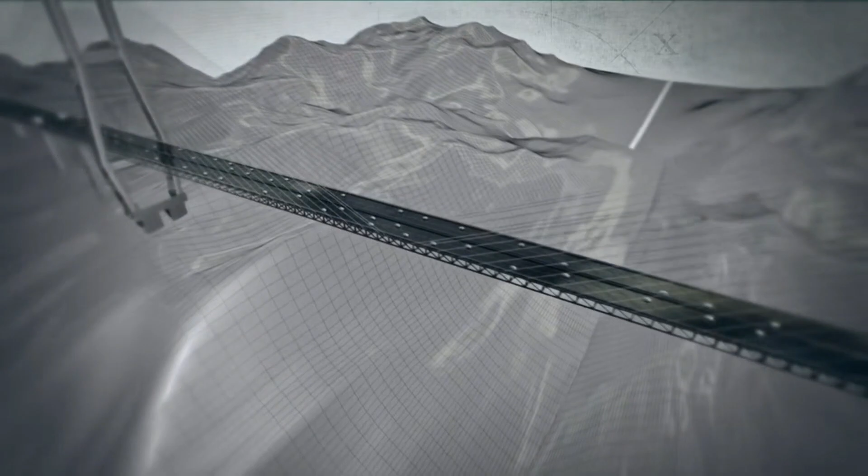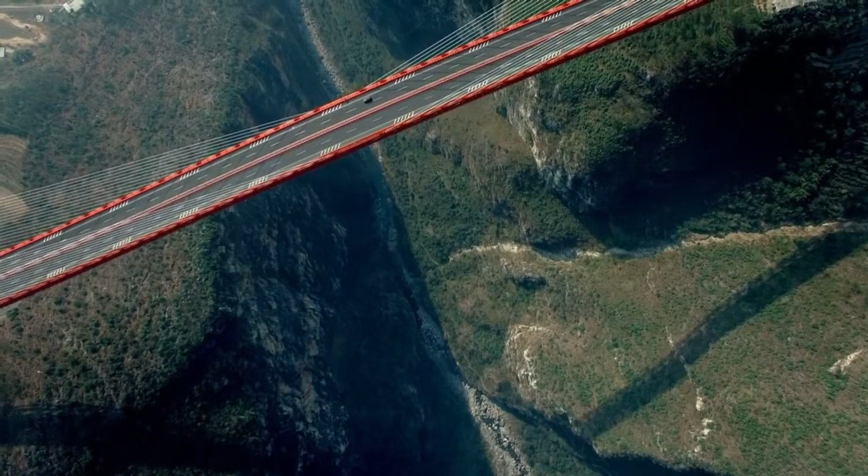The Beipanjiang First Bridge is cutting-edge engineering on a staggering scale, finally joining two regions that have been separated for centuries. We're now doing the same journey again, but instead of 5 hours, we're only taking 1 hour to cross this region. This is an absolutely amazing bridge, just really elegant. The view here is breathtaking.

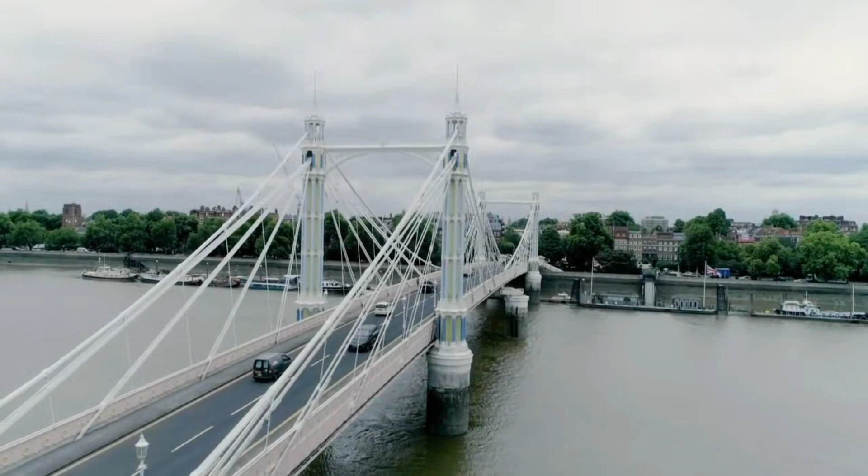This bridge changed the local people's life. It is an incredible engineering achievement. By learning from the pioneers of the past and overcoming terrifying challenges,